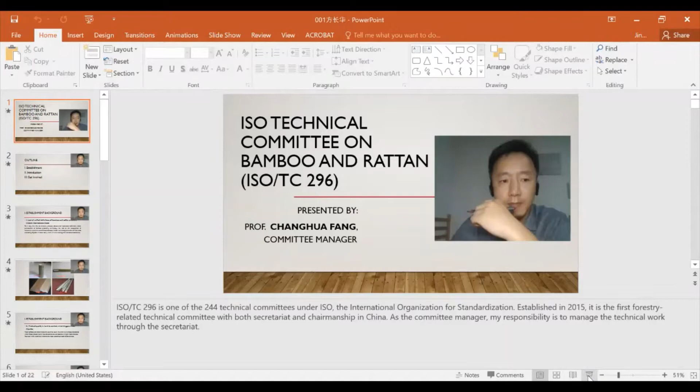Well, thanks for the invitation from INBAR. It is my great pleasure to have this opportunity to give you a brief introduction of ISO TC 296 on Bamboo and Rattan.

ISO TC 296 is one of the 244 technical committees in ISO, the International Organization for Standardization. TC 296 was established in 2015. It is the first forestry-related technical committee with both secretariat and chairmanship in China. As committee manager, my responsibility is to manage the technical work through the secretariat.

For the first part, I will talk about why TC 296 was established and what it does to help improve the current situation. The introduction part covers basic information about us, our members, work program, meetings, and projects. The third part, get involved, is for those who are interested in what we do and wish to find out more about how to participate.

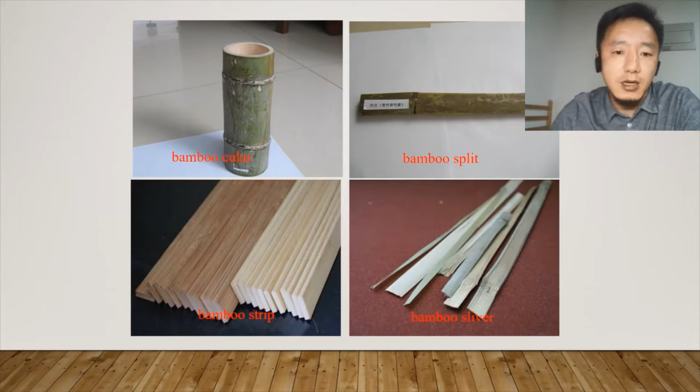The second aspect is that product quality is hard to control, which triggers trade disputes. Major bamboo and rattan producing countries usually have their own product standards, which makes product quality hard to control and can potentially trigger trade disputes. However, when it comes to international standards and international trade, consensus needs to be achieved.

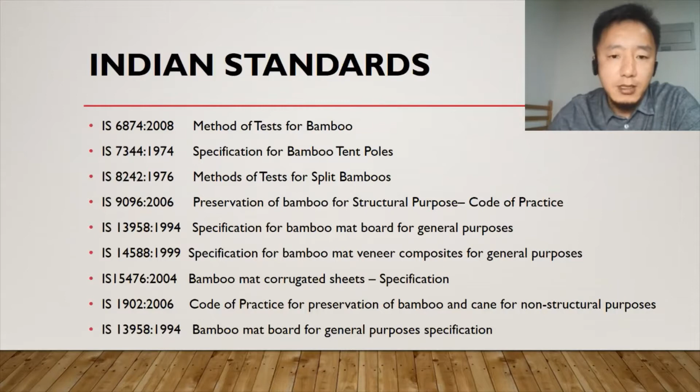In fact, a comprehensive system of bamboo and rattan standards is being set up in China to facilitate domestic bamboo and rattan production and trade, which encompasses cultivation, processing, utilization, production, and so on.

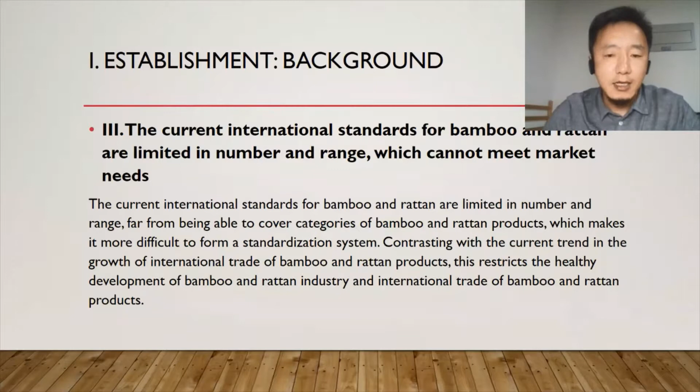The third aspect is that current international standards for bamboo and rattan are limited in number and range, which cannot meet market needs. Against such a background, the ISO Technical Management Board granted the Chinese proposal to set up a technical committee on bamboo and rattan, and it was numbered TC 296.

In this part, I will give you a brief introduction of this relatively new technical committee.

The Secretariat of TC 296 is the Standardization Administration of China. The chairperson is Professor Benhua Fei, from the International Center for Bamboo and Rattan. The committee manager is me, also from the International Center for Bamboo and Rattan. The scope of TC 296 is the standardization of bamboo, rattan, and derived materials, including terminology, classifications, specifications, test methods, and quality requirements.

Now we have 19 participating members, including China, Colombia, Ethiopia, Ghana, India, Indonesia, Kenya, Malaysia, Nepal, Netherlands, Nigeria, Philippines, Uganda, Ecuador, Egypt, France, Germany, Italy, Jamaica, and 16 observing members, including Argentina, Austria, Czech Republic, Iran, Japan, Korea, Poland, Portugal, Russia, Singapore, South Africa, Spain, Sweden, Switzerland, Britain, and Vietnam.

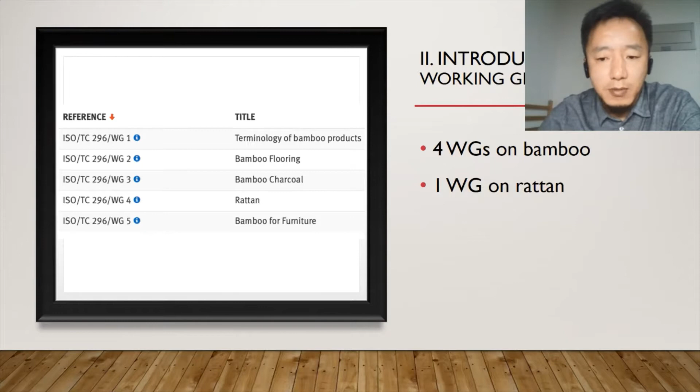Now we have one standard already published, which is ISO 21625, vocabulary related to bamboo and bamboo products, and 7 projects ongoing, including ISO 21626, bamboo charcoal with 3 series, and ISO 21629, which is bamboo flooring, including indoor use and outdoor use.

ISO 23066 is the vocabulary related to rattan materials and products. And the last project is 23067, which is the grading system for rattan.

Before introducing the ways to participate in our work, you have to first learn about the major roles in the ISO context. There are 2 types of roles mainly, which are management and technical roles. The management roles include the chairperson and the secretariat.

The technical roles include the convener, who is leading the experts in working groups, and the project leader, who is responsible for drafting and revising the standard text according to the working group decisions.

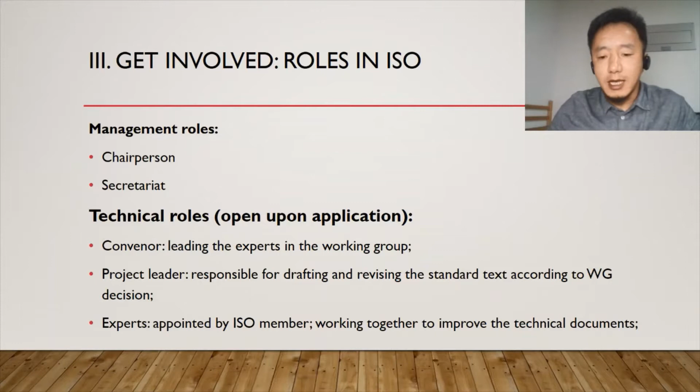And the experts are appointed by the ISO members. They work together to improve the technical documents.

To become a member, generally there are 3 ways to become involved, but all of which are based on the fact that the country is a member of ISO. So if your country is already an ISO member and is interested in becoming a member of our TC 296, you should apply directly to the Central Secretary of ISO.

If your country is not yet an ISO member body and is interested in becoming one, you should contact the ISO membership team. Companies and individuals are not eligible to join ISO as members.

If you have technical expertise on bamboo rattan related area, you can join us by becoming an expert, a convener, or a project leader. Experts of the technical committees are put forward by the ISO national members. If you are interested in getting involved, contact your national standards body.

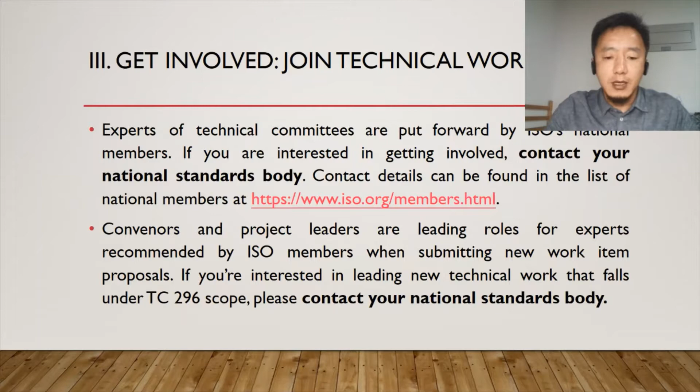You can find the contact details on this website. Conveners and project leaders are leading roles for experts recommended by the ISO members when submitting new work item proposals. If you are interested in leading a new technical work that falls within the TC 296 scope, please contact your national standards body.

You can also keep a close watch on what we do by visiting our own homepage on the ISO website. You can find more information there, and you can also follow us on the WeChat public account in Chinese, or the simple way is to contact us directly by sending an email.

We share the progresses of work, news, and information on Bamboo Rattan and standardization on a regular basis.

Okay, that's all. Thank you very much for your attention.

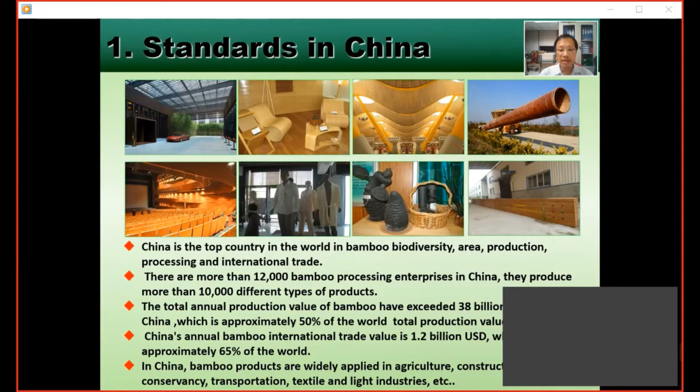China has the maximum number of bamboo standards. Now there are 5 kinds of bamboo standards in China, including national standard, industry standard, provincial standard, social organization standard, and company standard. The national standard can be classified into mandatory standard, recommendatory standard, and technical guidance document, while the other 4 kinds of standards are only recommendatory standards.

China's bamboo standards are distributed in 10 industry sectors, such as forestry, agriculture, building materials, light industry, textile and apparel, food and drug, commodity inspection, industry products, cultural heritage, and railway, but most of China's bamboo standards are distributed in the forestry sector. Up to date, China's bamboo relative standards include 38 national standards, 95 standards in the forestry sector, and 53 industry standards in other sectors,

plus 191 provincial standards and 31 social organization standards. Now there are 14 national standards and 58 standards in the forestry sector under development.

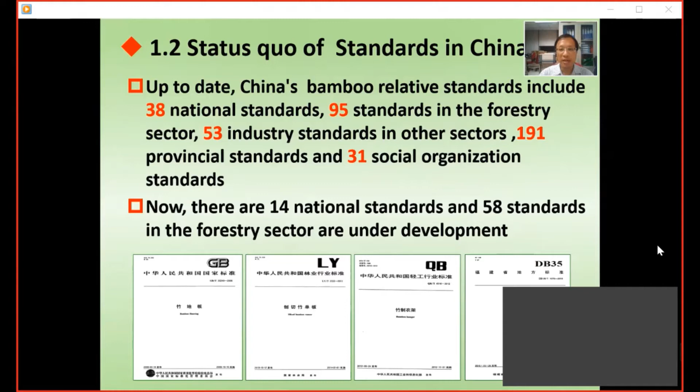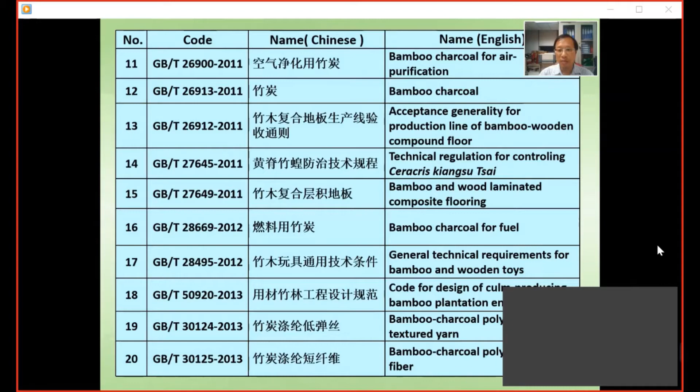Bamboo charcoal acceptance criteria for production line of bamboo wooden compound floor; technical regulation for controlling Ceracris kiangsu Tsai; bamboo and wood laminated composite flooring; bamboo charcoal for fuel; general technical requirement for bamboo and wooden toys; code for design of culm-producing bamboo plantation engineering; bamboo charcoal polyester strong texture yarn.

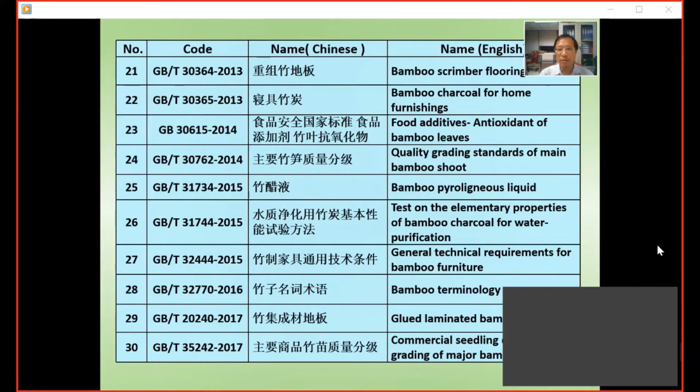Bamboo charcoal polyester staple fiber; bamboo scrimber flooring; bamboo charcoal for home furnishing; food additive antioxidant of bamboo leaf; quality grading standard for main bamboo shoot; bamboo pyroligneous liquid; tests on elementary properties of bamboo charcoal for water purification; general technical requirement for bamboo furniture; bamboo terminology; laminated bamboo flooring; commercial seedling quality grading of major bamboo species; testing method for tensile property of plant fiber individual fiber.

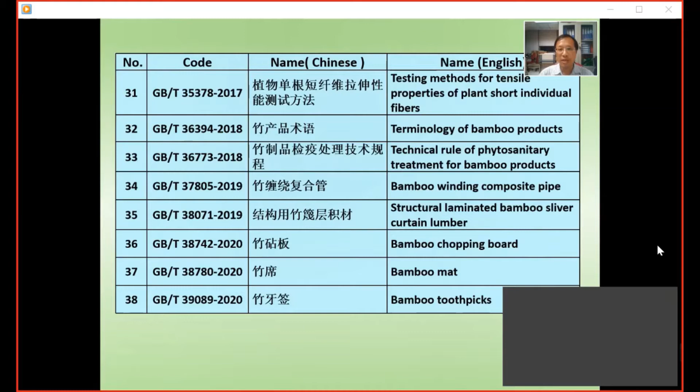Terminology of bamboo products; technical rule of phytosanitary treatment for bamboo products; bamboo winding composite pipe; structural laminated bamboo sliver curtain lumber; bamboo chopping board; bamboo mat; bamboo toothpick. The picture shows you 14 national standards under development, including outer bamboo screen, laminated bamboo sliver lumber for...

structure, dry bamboo shoot, bamboo commercial seedling technique method for afforestation, bamboo fiber, textile test method of qualitative and quantitative analysis for bamboo-based fiber and certain other fiber, method of fast determination of moisture content of preservative, plaited bamboo household products, textile quantitative chemical analysis, mixture of viscose or bamboo fiber or modal and lyocell using formic acid and zinc chloride, general specification for moulded flat pallets with bamboo and wood shaving.

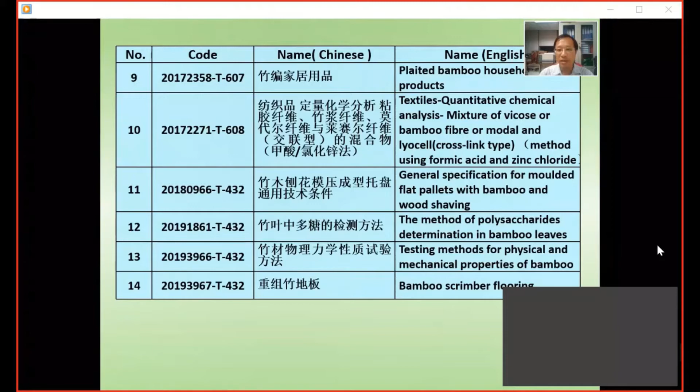The method of polysaccharides determination in bamboo leaf; test method for physical and mechanical property of bamboo; bamboo scrimber flooring.

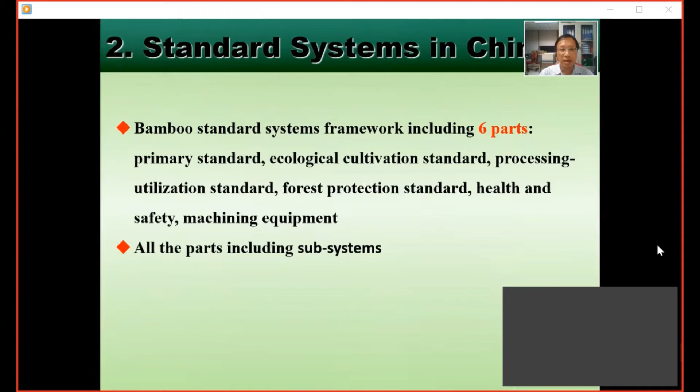China has a perfect standard system. According to bamboo resource, current situation of bamboo processing and utilization, China established a bamboo standard system formed by internal connections. The bamboo standard system framework includes 6 parts: primary standard, ecological cultivation standard, processing utilization standard, forest protection standard, health and safety standard, and machine equipment standard. All parts include subsystems. The picture shows you the bamboo standard system framework.

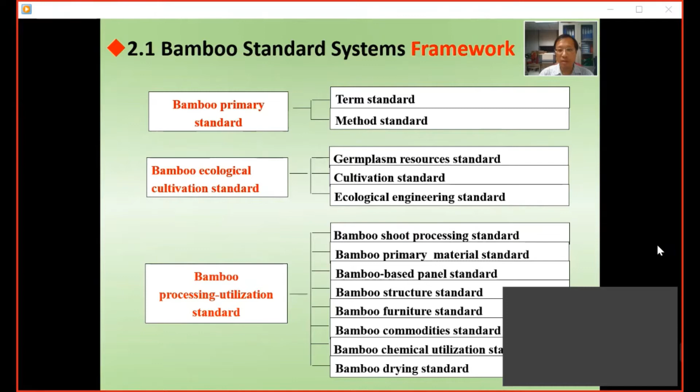Bamboo primary standard includes term and method standard. Bamboo ecological cultivation standard includes germplasm resource, cultivation, and ecology engineering standard. Bamboo processing utilization standard includes bamboo shoot processing, bamboo primary material, bamboo-based panel, bamboo structure, bamboo furniture, bamboo commodities, bamboo chemical utilization, and bamboo drying standard. Bamboo forestry protection standards include bamboo pest prevention and control, bamboo forest fire prevention, and bamboo anti-insect standards.

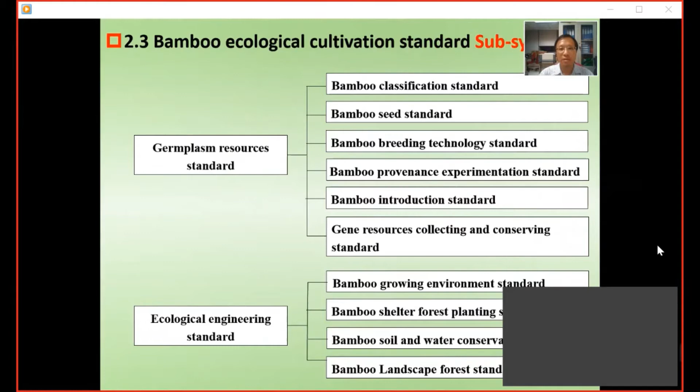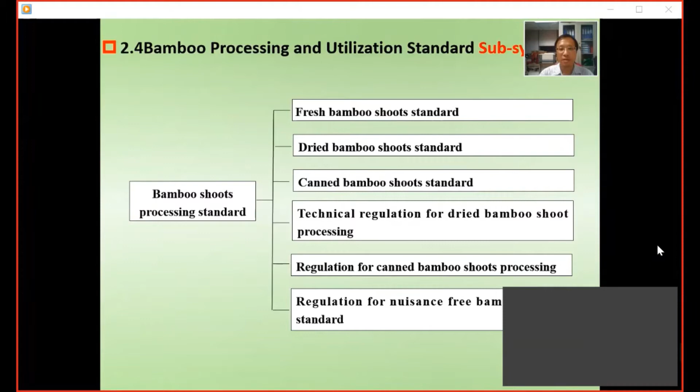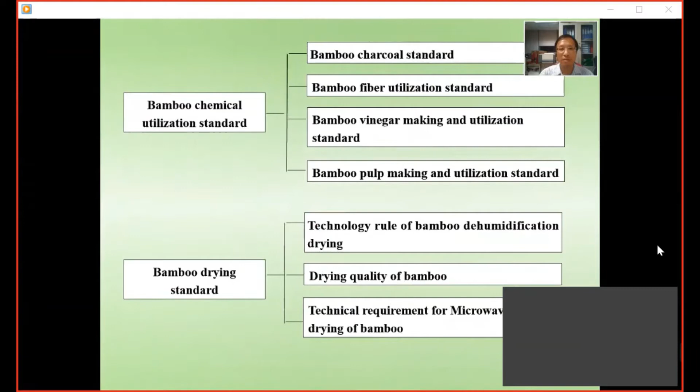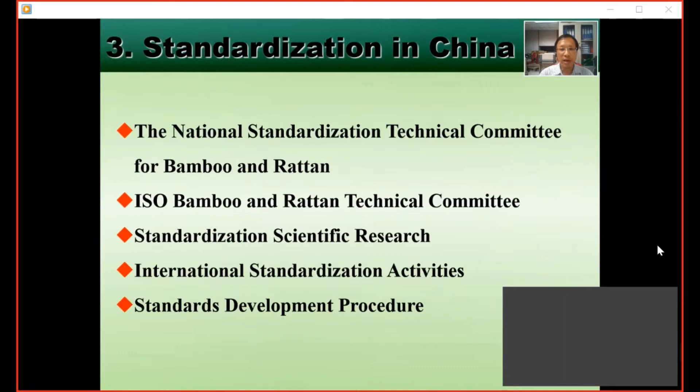In this chapter, I will introduce standardization in China, including the National Standardization Technical Committee for Bamboo and Rattan, the ISO Bamboo and Rattan Technical Committee, Standardization Scientific Research, International Standardization Activity, and Standard Development Procedure.

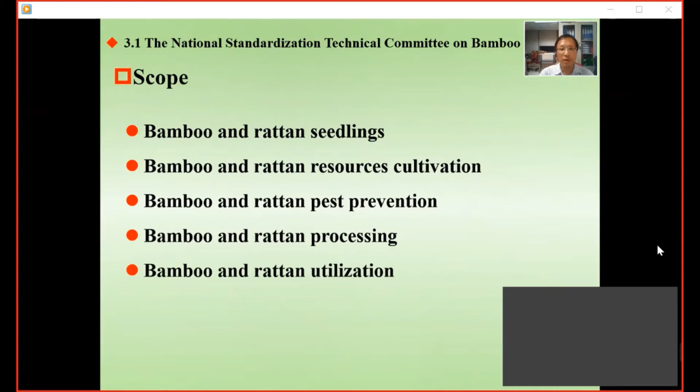The National Standardization Technical Committee on Bamboo and Rattan is commissioned by the Standardization Administration of China and the State Forestry and Grassland Administration. It was established in 2003. The scope covers bamboo and rattan seedlings, resource cultivation, pest prevention, processing, and utilization.

Its mission is structuring policy and technical measures for standardization, revision and review of national and industry standards, proper management and implementation of national and industry standards, and international standardization activity.

The ISO Bamboo and Rattan Technical Committee was approved in 2015, and ICBR is authorized for the management of the TC 296 secretariat.

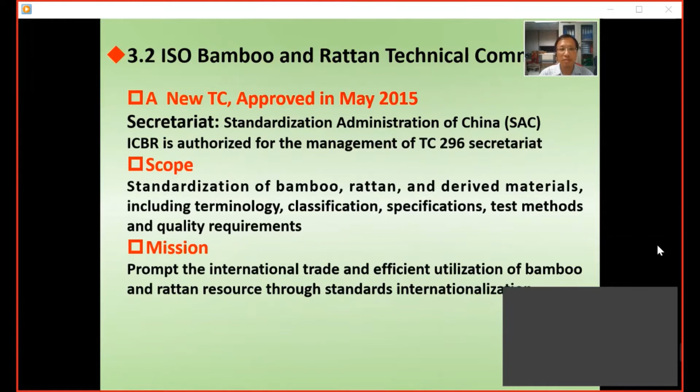Now many projects support standardization scientific research, such as the 5-Year National Science and Technology Support Program, the Forestry Public Welfare Industry Research Special Project, the Agriculture Standardization Project, the Forestry Standardization Project, and the ICBR Fundamental Research Fund Grant Project.

Through these projects, we construct the bamboo structure engineering standard and the bamboo technical standard system, carry out standard applicability studies, and study the key technology.

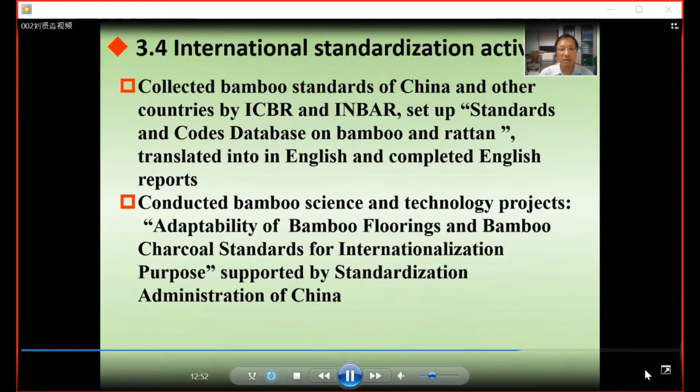In this chapter, we collected bamboo standards of China and other countries by ICBR and INBAR, and conducted bamboo science and technology projects. We implemented a program for the promotion of bamboo fabricated board houses in Asia and Africa, to track the standard bamboo mat, plywood, semi-finished bamboo product, and laminated bamboo board.

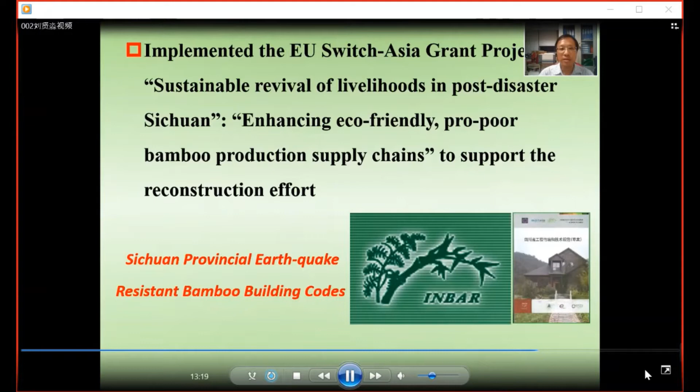We implemented the EU Switch Asia Grant Project. China has published the international cooperation paper, nomenclature for engineering bamboo, with contributions from many institutes and famous universities such as UBC, Cambridge, and MIT.

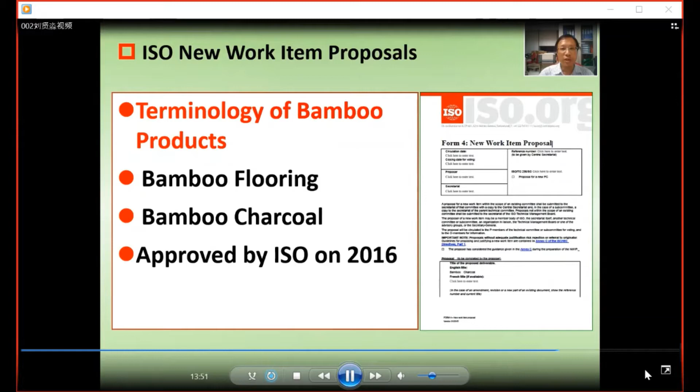China has proposed 3 ISO new work items: terminology of bamboo products, bamboo flooring, and bamboo charcoal. The vocabulary related to bamboo and bamboo products ISO standard was published this year. China, along with France, Netherlands, Ghana, Kenya, Ethiopia, Colombia, Indonesia, Philippines, Nepal, Nigeria, and Jamaica, participated in this standard.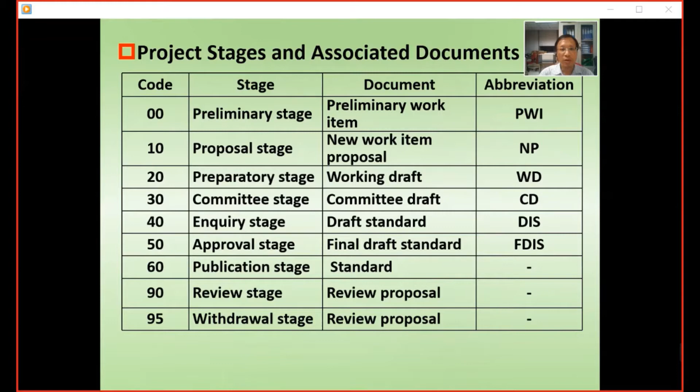Now I'll introduce the standard development procedure. Experts can apply for a forest standard project annually, and apply for a national project at any time. China has project stages just like ISO's project stages, including 9 stages: preliminary stage, proposal stage, preparatory stage, committee stage, inquiry stage, approval stage, publication stage, review stage, and withdraw stage.

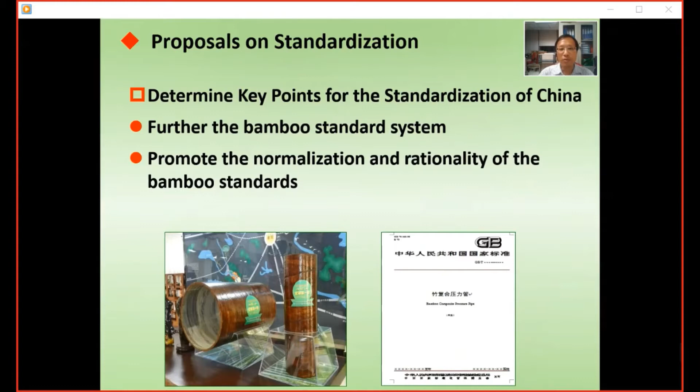Proposals on standardization: determination of key points for standardization of China. Further the bamboo standard system. Promote the normalization and rationality of the bamboo standard. Develop detailed standard procedures. Speed up the arrangement of standard work, including establishment, review, propaganda, and implementation of the standard. Ensure the period of bamboo standard establishment within 2 years, and the age of the standard within 5 years. Promote wide application of the standard.

Strengthen international cooperation on bamboo standardization through the ISO and INBAR platforms under the guidance of SAC and SFGA, to enhance cooperation with other countries on bamboo standardization, to promote sustainable development of the international bamboo industry in the future, and to make a contribution to the global bamboo industry and trade.

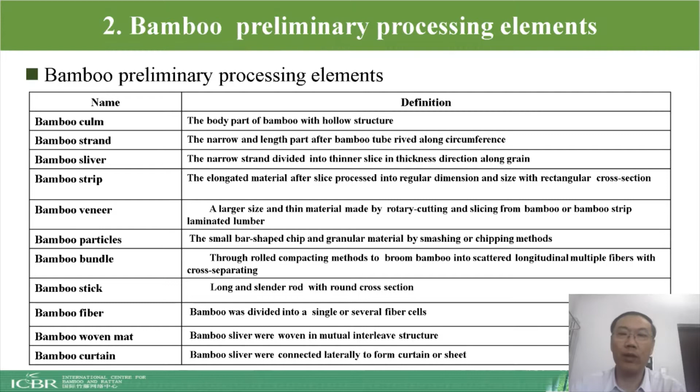As I mentioned in the last slide, this picture shows us different shapes of the various preliminary processing elements from bamboo culms.

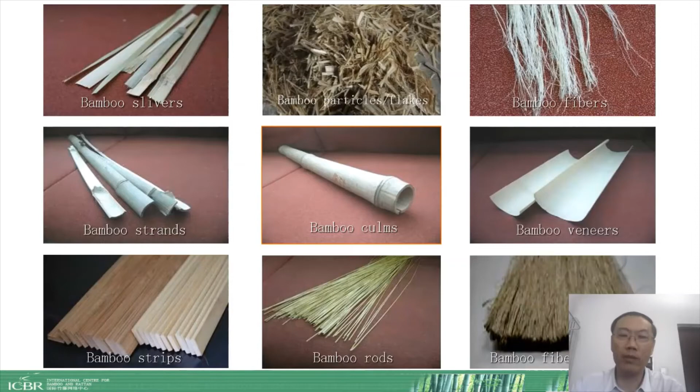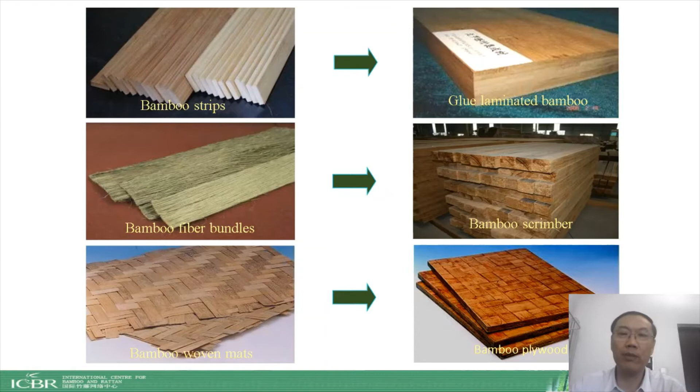Different preliminary processing elements produce different end products, such as glue laminated bamboos, which are made of bamboo strips. Bamboo scrimbers are made of bamboo fiber bundles. Bamboo plywood is made of bamboo woven mats.

Everybody knows there are many kinds of traditional bamboo products, such as chopsticks, toothpicks, baskets, papers, and so on. Now in the market, we already have various bamboo products involving food, textile, construction, and transportation.

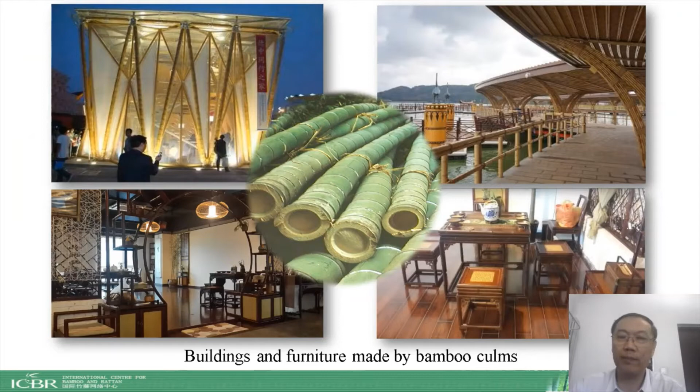I'll present some innovative technologies and new products with the cases.

As I mentioned, bamboo has the typical vascular bundle structure. Among them, fibers play a very important role in the strength of the bamboo. For better utilization and further understanding of the mechanism, we should know individual fiber strength itself.

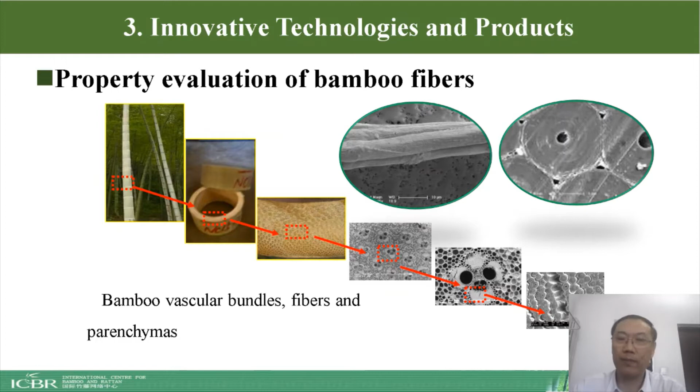But for bamboo, a single fiber is short in length, only 2 or 3 millimeters, and small in diameter, 10 or 20 micrometers. So it is hard to hold such a small single fiber for testing.

To overcome this problem, we developed a new technology to test the tensile strength of a single plant short fiber. It can test fibers even 1.2 millimeters in length.

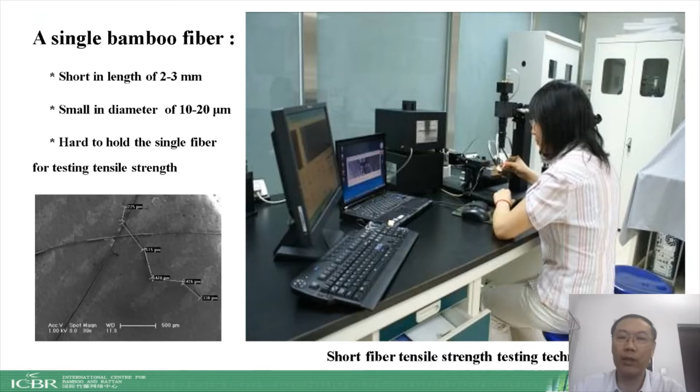What we have done: first, we make two epoxy resin droplets to glue at the two ends of a single fiber. We designed a special V-shaped clamp. Then we put a single fiber with cured resin droplets into V-shaped clamps, like this.

After that, stretching clamps perform the tensile test to get the end load until the fiber fractures.

Finally, we used a confocal laser scanning microscope to measure the various cross-sectional areas of the fracture appearance with ImageJ software. We can get the stress by calculating using a formula.

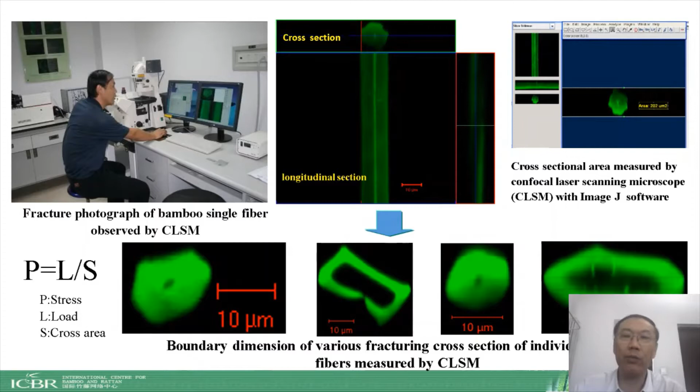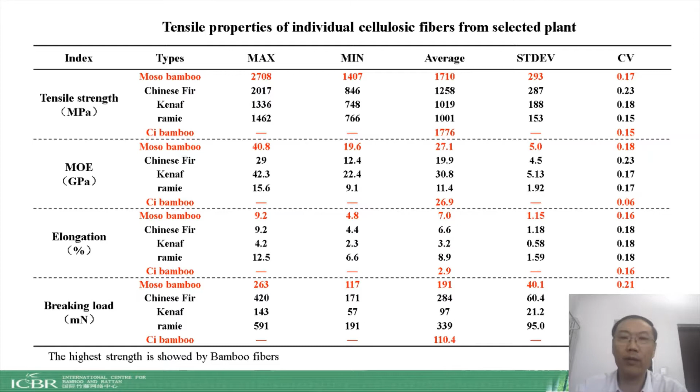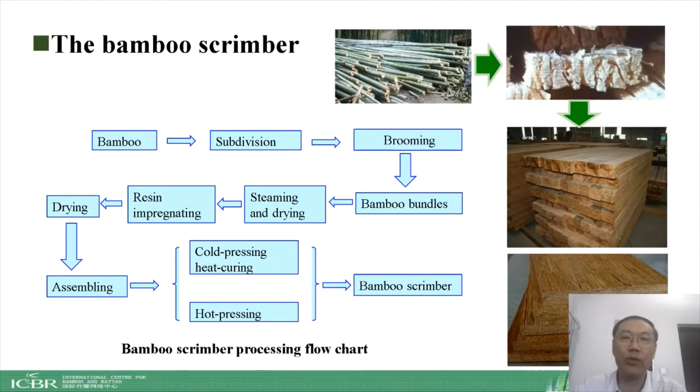This kind of material has high strength and high density, as well as good waterproofing ability. They are used as outdoor floorings and external walls of buildings, and also various deckings.

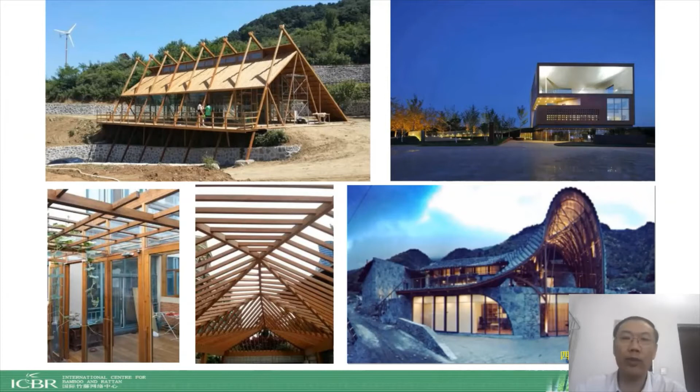They have also been widely made into structural materials for construction purposes, and even used as internal decoration of the great theater, roof, wall, and chairs. Bamboo scrimbers have also been used to make all kinds of furniture, in many styles.

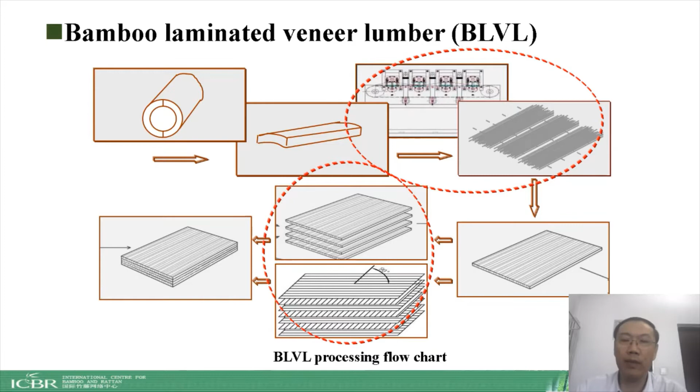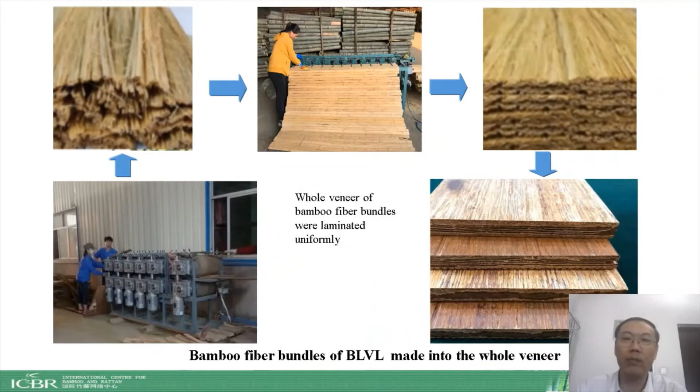Processing technology on bamboo laminated veneer lumber, briefly called BLVL, makes bamboo fiber bundles into a whole big-size veneer. This whole veneer is then laminated uniformly, layer by layer, and held together to become the BLVL product finally.

Through this method, see the fine result. Compared with common scrimber, BLVL has more uniform density and more even strength distribution, making it more suitable for use as structural materials.

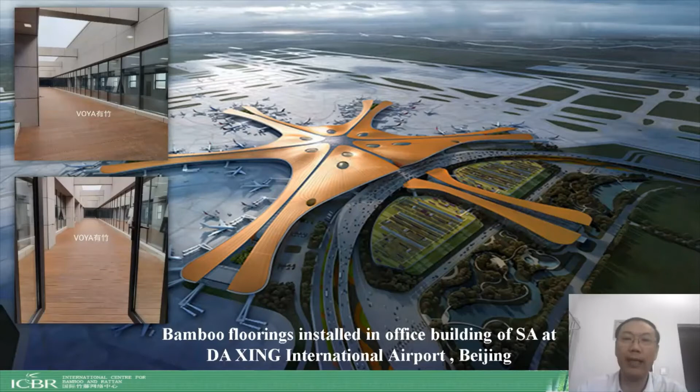Here shows the actual production process. This kind of material has been used as floorings installed in the office building of South Airline at Daxing International Airport in Beijing, and also applied as compound walls of prefabricated housing.

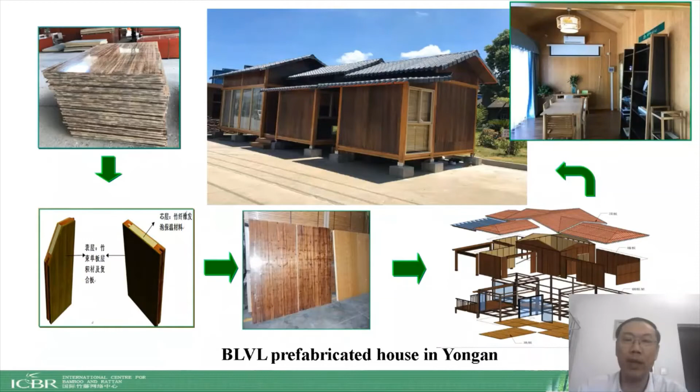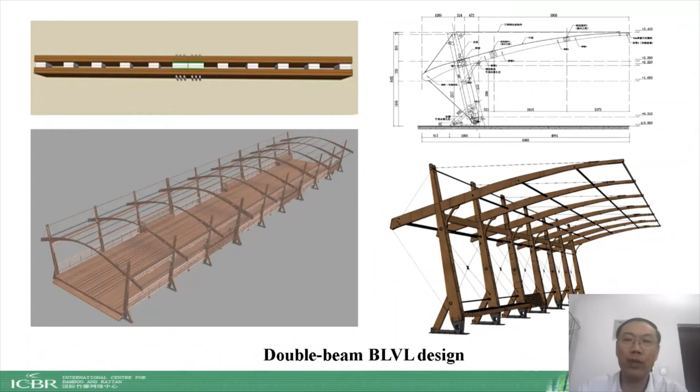Look at the picture. BLVL had also been designed to make the double beam, which has higher stress resistance and stability, as well as being lightweight.

The double beam was applied as the vehicle shed and a corridor, with lightweight and high stress properties. Look at the pictures.

Next, we move to talk about innovative processing technology on bamboo winding composite pipe. This is a schematic diagram of the processing technology on bamboo winding composite pipe.

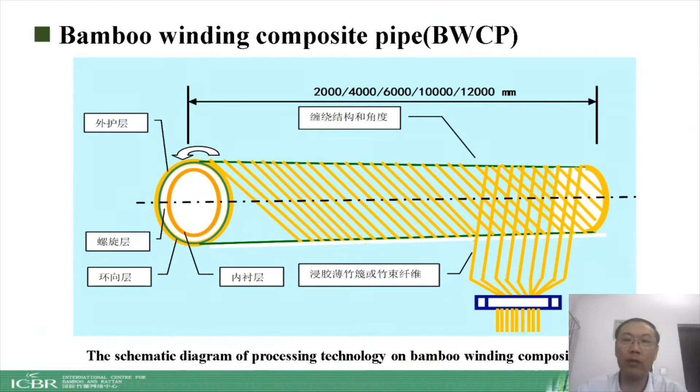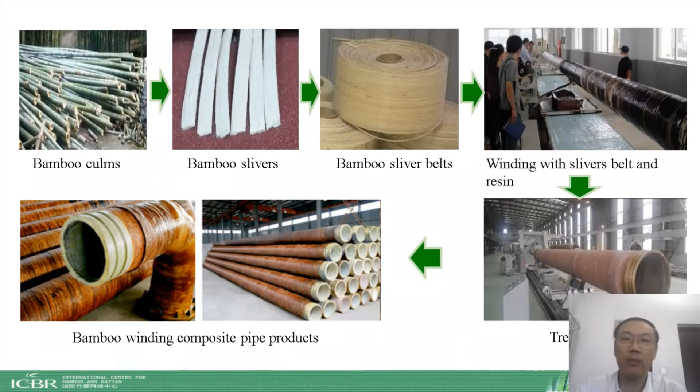We use bamboo long slivers, winding them together to form pipes. Here pictures show some details. Bamboo culms are separated into slivers and sliver belts, and then sliver belts are wound with resin to form the pipe. Finally, this pipe needs to be treated for waterproofing.

We list the main technical performance of the BWCP here, according to the requirements of relative pipe standards.

Application fields include water transportation, farmland irrigation, urban water supply, and drainage. Compared with the current steel pipe, glass fiber pipe, engineered plastic pipe, BWCPs are cheaper, lighter, eco-friendly, and resource sustainable.

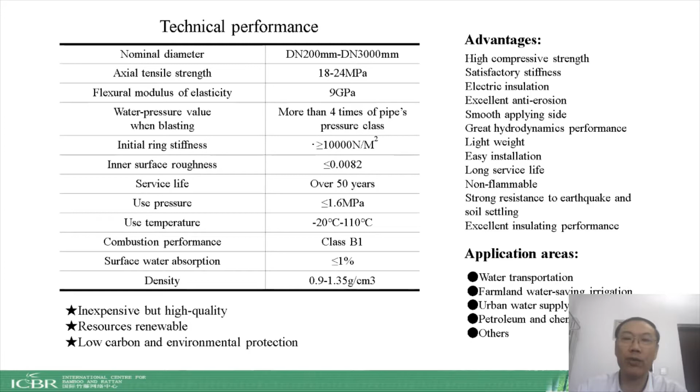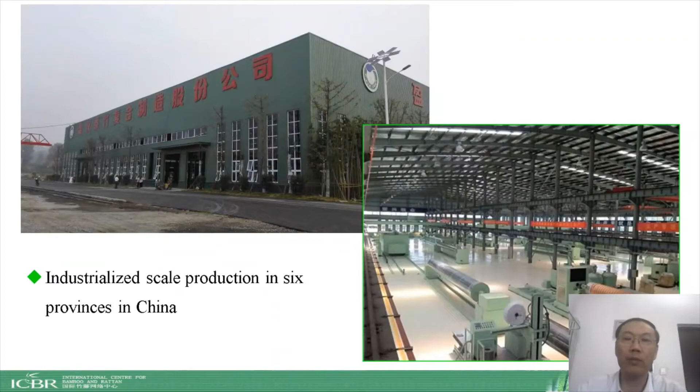It had been realized, industrialized large-scale production in 6 provinces in China. These are mass BWCP products, widely applied in various climatic conditions, such as tropical areas, cold areas, and arid areas.

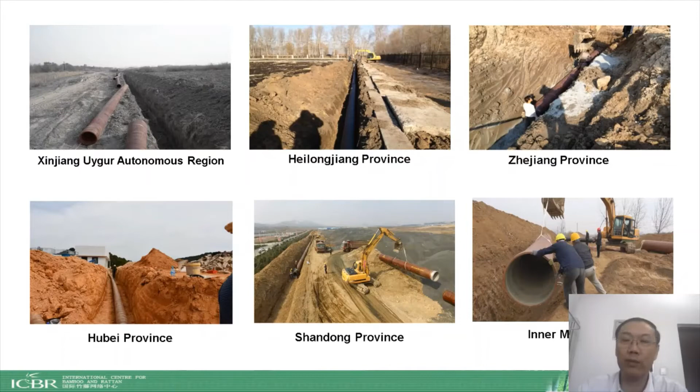In Xinjiang, Heilongjiang, Zhejiang, they are working well until now. This is a bamboo-based winding composite pipe installation site. Not just only used for water transportation purpose, we also can produce a large diameter bamboo winding composite pipe used as city utility tunnel and underground. Diameter can range from 5 meters to 8 meters.

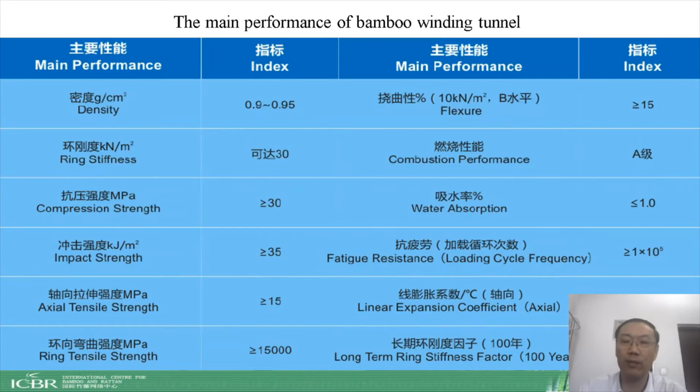The performance of winding tunnel meets the requirement of utility tunnel standards. The table presents some details data, includes stiffness, stress, fatigue resistance, and so on. The first bamboo winding composite urban utility tunnel was successfully built in Hohhot City in China.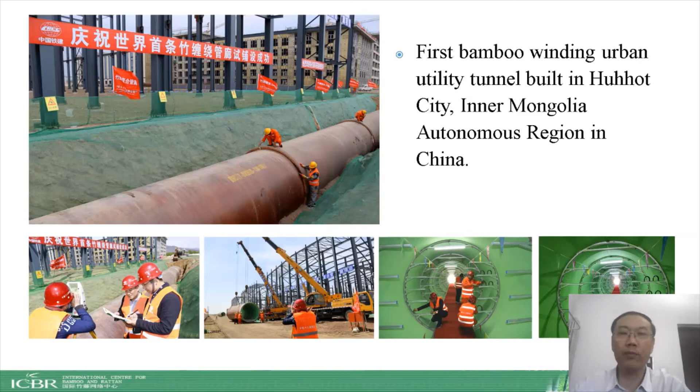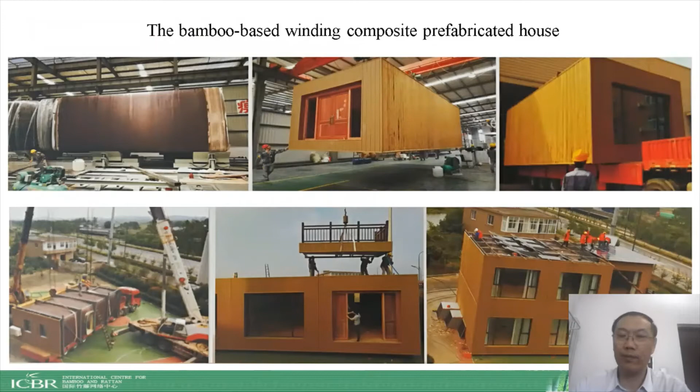And the bamboo-based winding composite can also be produced for fabricated house through assembling several bamboo winding parts, connect them together. We can get an entire house with many advantages, including anti-earthquake, good thermal insulation, faster installation speed, and lower cost. Here shows some various construction made of BWCP materials, such as modular assembler farmhouse and modular assembler restaurant room.

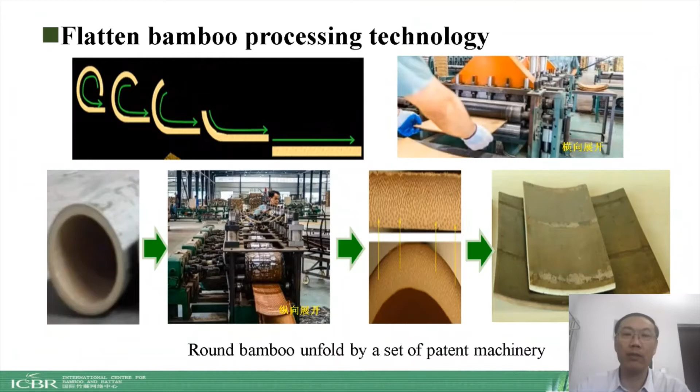Well, let's talk about a new processing technology, flattening bamboo. Through a set of patent technology and machinery, the round bamboo culm was directly unfolded to flatten board. Do not need to make them into small elements such as sliver, strips, and fibers. Furthermore, like the picture shows, bamboo culm can be unfolded with high temperature vapor in tunnel. The flattened bamboo board has more dimensional stability and good quality.

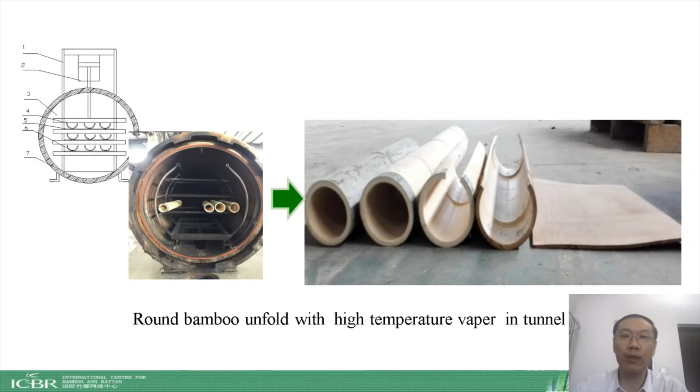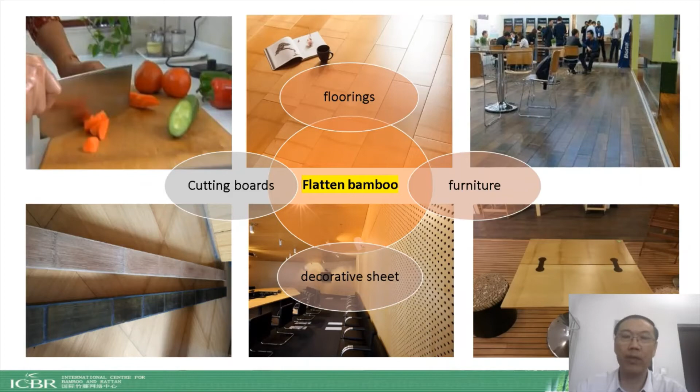The flattened bamboos have been used to make cutting board, flooring, furniture, and decorative materials, many kinds of products. Here is a flattened bamboo flooring, decorative wall.

Now, we will introduce the bamboo fiber-based automotive internal parts. The certain lengths bamboo fibers were processed to develop molded products used as car interior parts instead of polymer materials, to meet the environmental requirement and reduce weight for automobile industry.

Lots of car interior parts can be made by bamboo fiber-based molded products, such as door interiors, panels, rear shelf, headliners, instrument panels, side track covers, and so on.

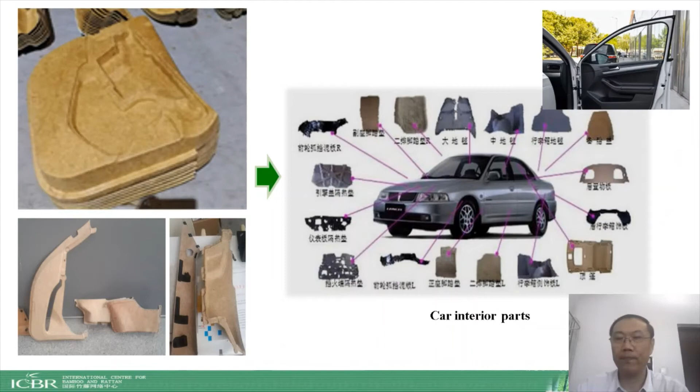So let's go to see the next technology, bamboo fiber-based food container and tablewares. This is a technical process for making bamboo fiber food containers. First, bamboo culms were made into fine fibers through physical and mechanical methods, not chemical methods. Mixed with a little starch, molded mass into certain shaped products, and then trimming, ultraviolet sterilizing, checking, and packaging.

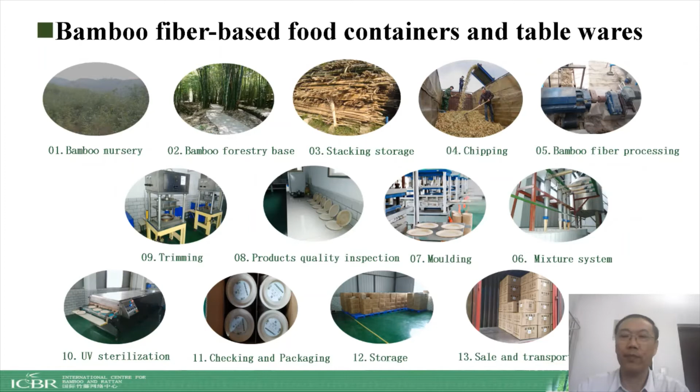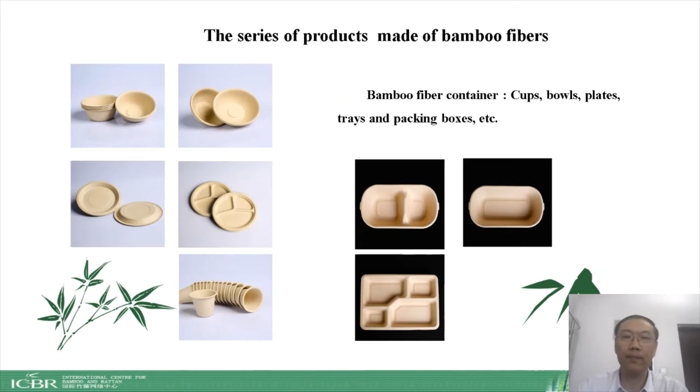There are various series of products made of bamboo fibers, such as cups, bowls, plates, trays, and packaging boxes, and so on. This technology can make biodegradable bamboo fiber containers instead of plastic ones, reducing pollution and protecting the environment. They are eco-friendly, can meet the requirement of people's life.

And this is another technology to produce tablewares made of bamboo slices, knife, fork, and spoon. They're very popular in the market instead of plastic ones, especially in European and American countries.

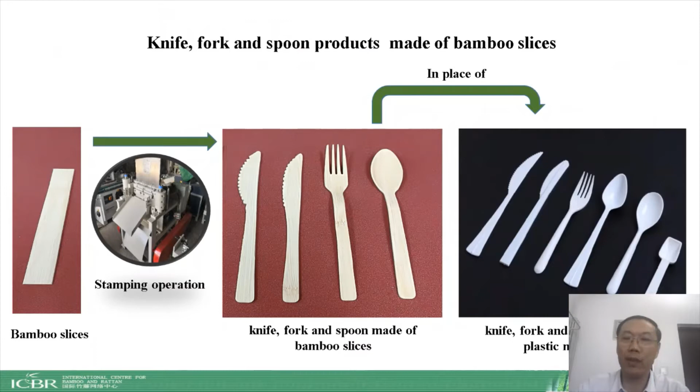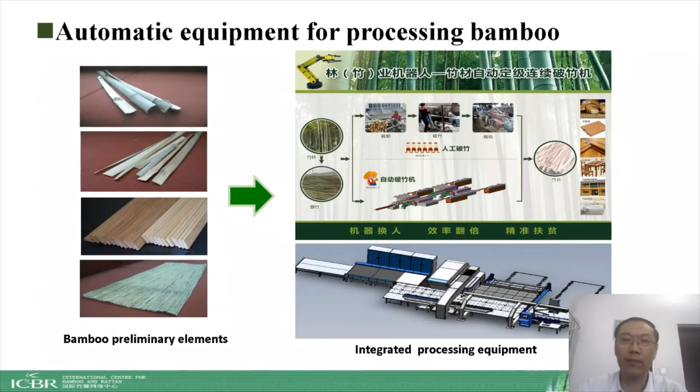Finally, let's talk about automatic equipment for processing bamboo elements. Now, so as to bamboo industry development, the bamboo preliminary elements need to be processed more efficiently, saving labors, reducing cost. So integrated processing equipment have been developed recently. The bamboo cutting, splitting, rough milling equipment is to replace the workers, increasing efficiency. They can produce bamboo strips and slivers.

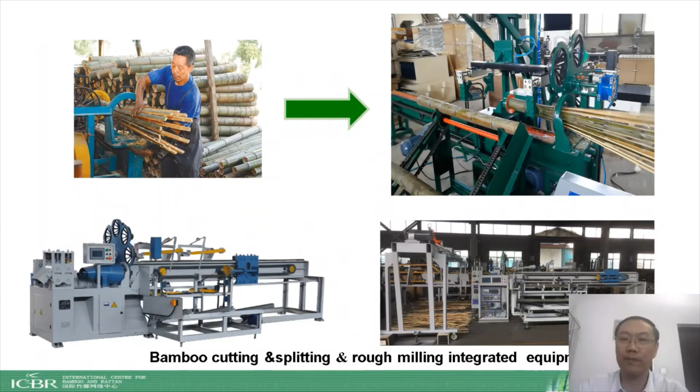Finally, development trends of bamboo processing and utilization. The first is to investigate on which species is suitable for certain use, including sympodial or monopodial bamboo. So many research projects are still in process.

And second, how to plant more high-quality bamboo for the manufacture of bamboo-based products. To establish correlation between bamboo and bamboo-based end products, ranging from micro size to macro size level. Large-scale and high-level automatic processing equipment should be developed or manufactured as soon as possible. To study on how to obtain the end products with low density, uniform strength, high performance, and multifunction.

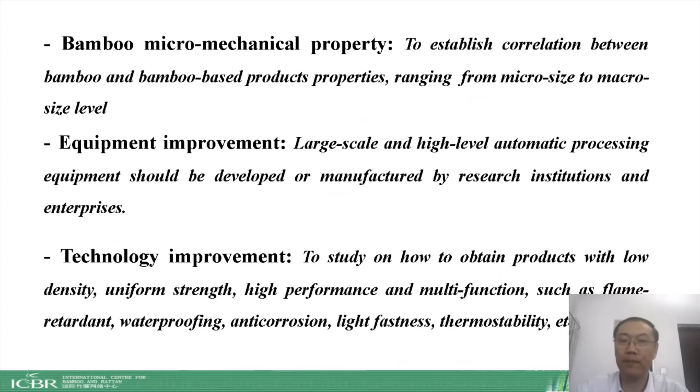Bamboo-based products should be more applied in engineering structure and outdoor fields, not just in room. To explore how to solve the environmental issues. As more and more different variety of bamboo-based products come out recent years, the corresponding testing and evaluating method and standards should keep up the pace.

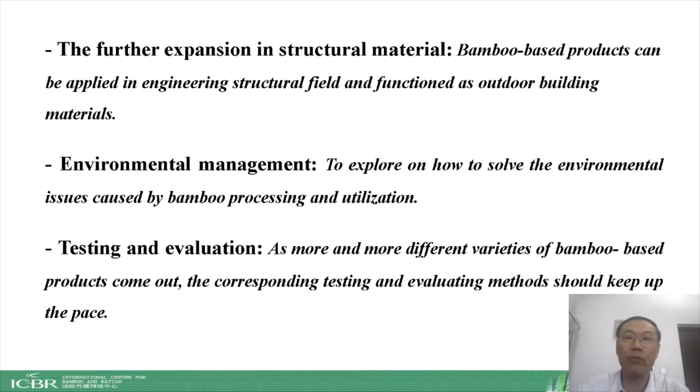To sum up, some bamboo processing innovative technologies and new products have been developed recently. I just introduced some of them. To meet the needs of economic development, we still have many work need to do, but I trust there's a great potential and bright prospect in the future for the bamboo processing industry.